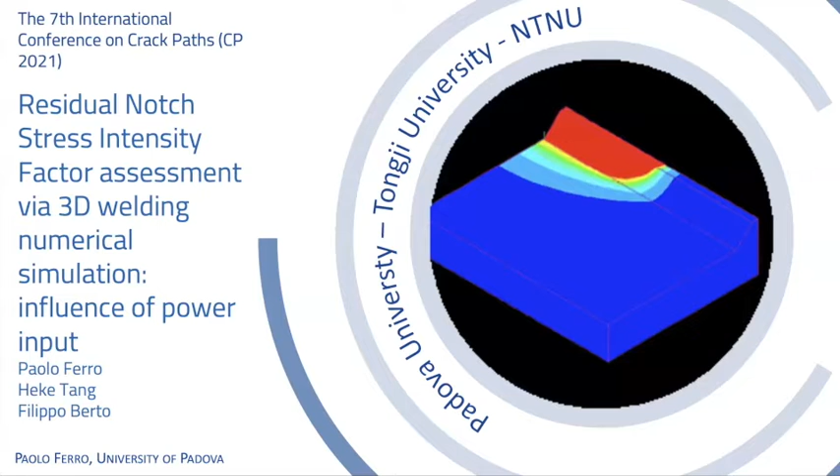Hi, this is Paolo Ferro speaking, and in my talk I would like to summarize the research work titled Residual Notch Stress Intensity Factor Assessment via 3D Welding Numerical Simulation: Influence of Power Input, by myself, Professor Tang and Professor Berto.

I will start with an introduction focusing on the goal of the work, and then I will proceed with the details of the numerical model, the results and discussion, and finally the conclusions.

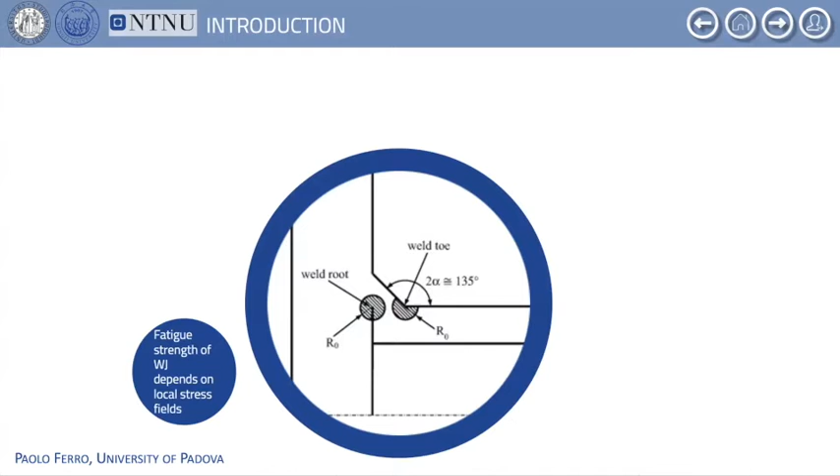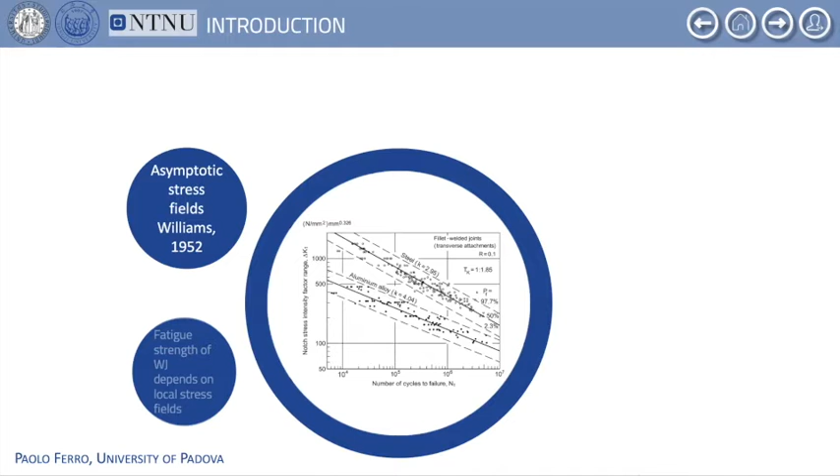It is well known that the fatigue strength of welded joints depends on the local stress field that arises at the weld toe or weld root. Because of such geometrical discontinuities, the local stress fields are singular in nature, and this is the same when we are dealing with residual stress as well.

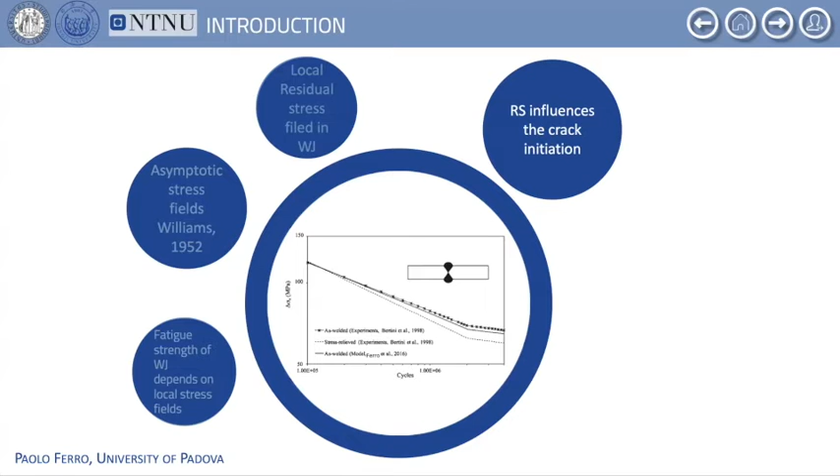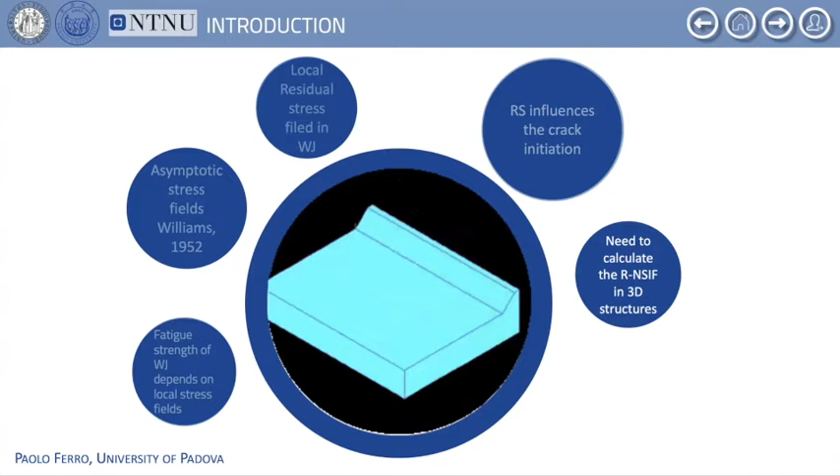The residual stress influences crack initiation in the high cycle fatigue regime, where plastic effects can be neglected. For this reason, it is very important to assess the parameter that quantifies the intensity of the singular residual stress field, called the residual notch stress intensity factor, in particular using 3D numerical models and therefore capturing boundary effects.

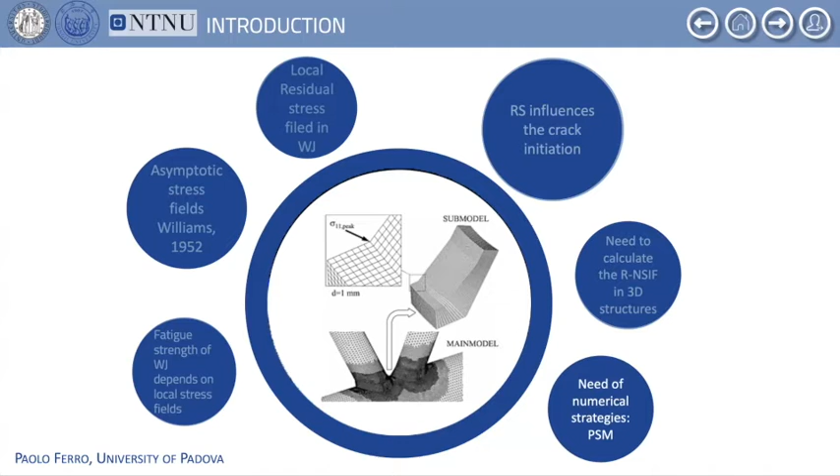Since 3D numerical models are tremendously demanding in terms of computational costs, numerical strategies are required to reduce the computational effort, such as the peak stress method.

In this scenario, the influence of process parameters on the residual asymptotic stress distribution has not yet been investigated using 3D numerical modeling of the welding process. Therefore, this work is aimed at filling this gap.

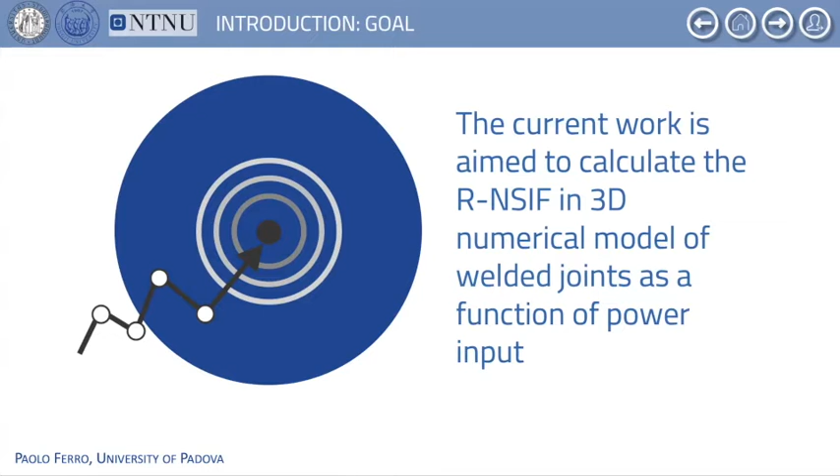Computational welding mechanics and the peak stress method are combined to calculate the residual notch stress intensity factor as a function of the power input. Results are then summarized in terms of heat input and discussed in view of a future guideline proposal addressed to designers who are going to face a welding process optimization for fatigue life improvement.

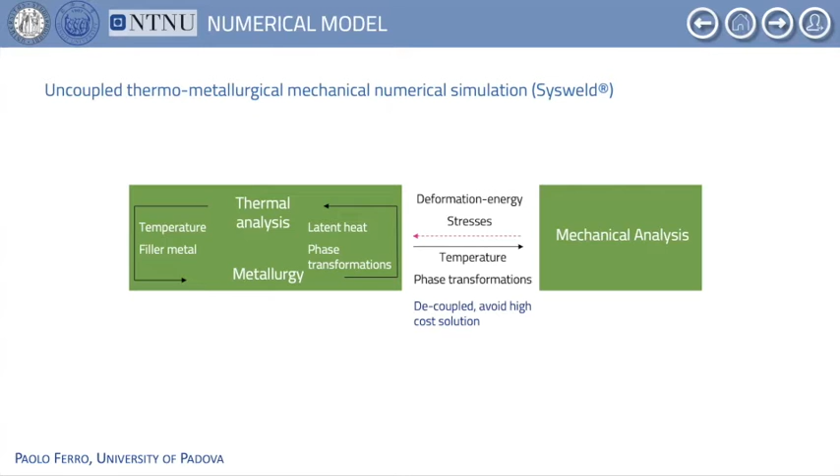A butt welding process was simulated using Sysweld code with the methodology known as computational welding mechanics. Thermo-metallurgical and mechanical analyses were uncoupled. Moreover, the welding is supposed to be performed with only one pass.

Taking advantage of the symmetry, only one half of the joint was modeled, as shown in this figure, where the global Cartesian and local cylindrical reference systems are displayed as well.

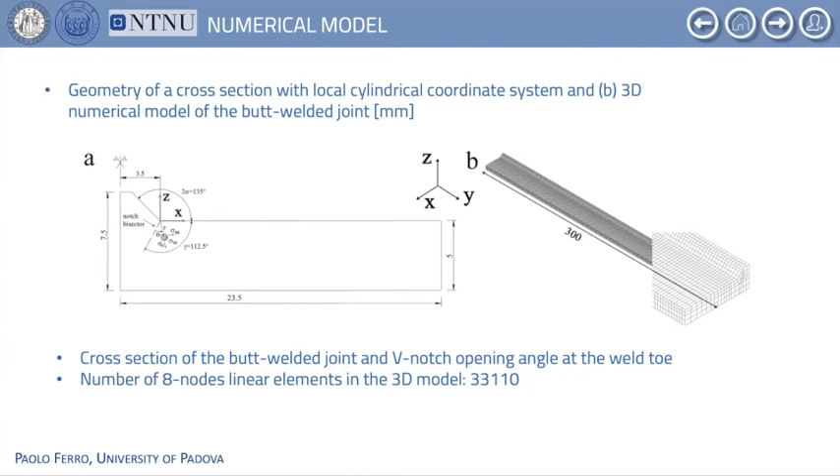33,110 eight-node brick elements were used to build the mesh, the smallest ones in the vicinity of the weld toe having a size of 1 millimeter. It is shown that the weld toe profile is assumed to be a sharp V-notch with an opening angle of 135 degrees and a null tip radius, which is the worst case condition.

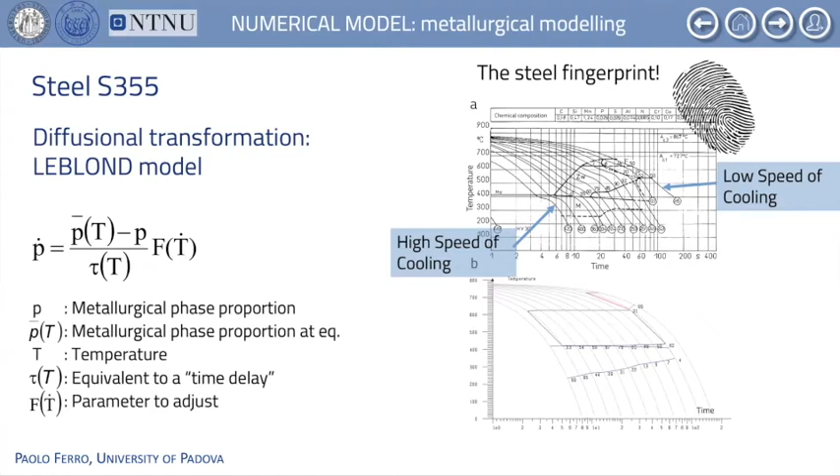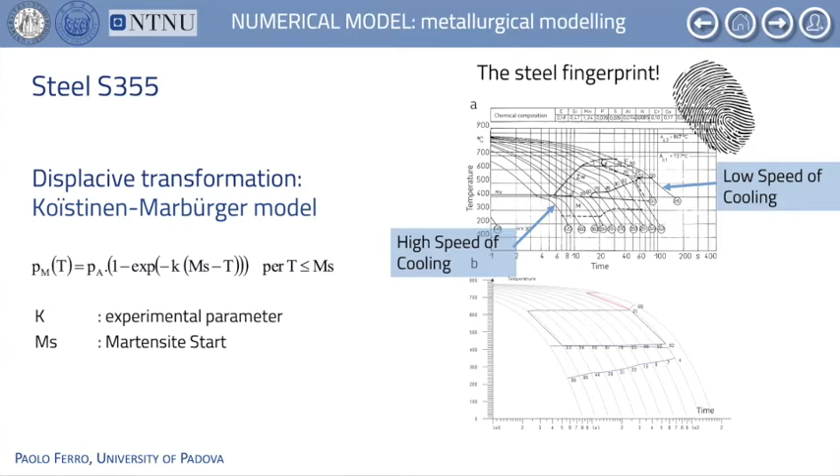The material investigated in this work is S355 structural steel, whose solid-state transformations are modeled using the Leblond-Devaux model when considering diffusional transformations, and the Koistinen-Marburger model when dealing with displacive transformation, as is the martensitic transformation. Model parameters are calibrated by referring to the experimental CCT curves of the steel, as shown on the right side of this slide.

The heat generation due to the heat source moving over the weld line is described by the power distribution function proposed by Goldak in 1984 for arc welding processes. Gaussian parameters of the Goldak heat source were chosen in a way that they produce a proper molten weld pool. Radiative and convective heat losses were modeled using the Stefan-Boltzmann law and convective heat transfer coefficients respectively.

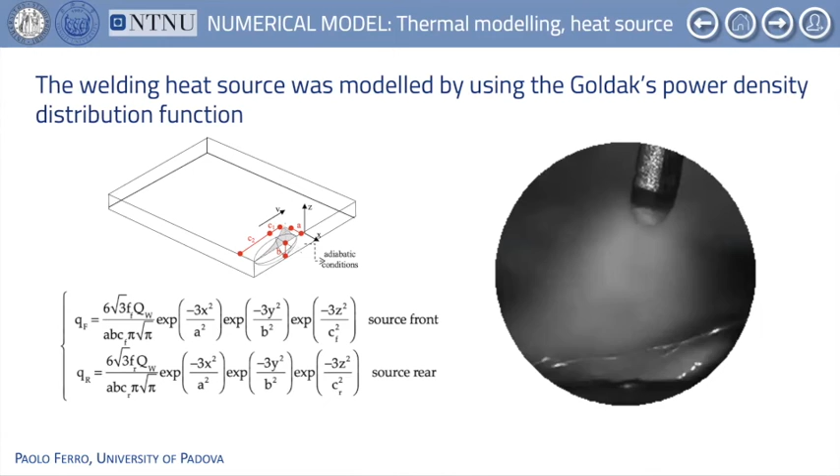Sequentially, a thermo-metallurgical-mechanical uncoupled simulation was carried out, where a dedicated function was employed to set the mechanical properties of the material to zero in all nodes where the computed temperature was higher than the melting point. Moreover, isostatic clamping conditions were applied during and after welding.

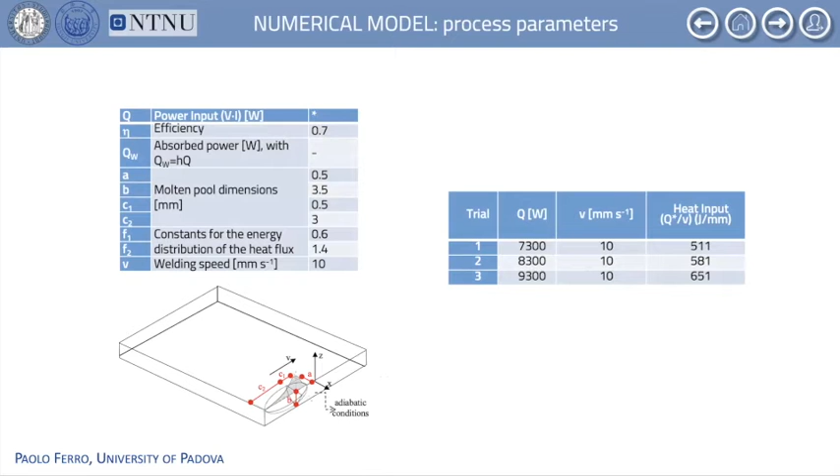These two tables show, on the left side, the parameters of the heat source kept constant, and on the right side, the power input values used in the trials.

In local approaches, the weld toe is schematized referring to the worst case as a sharp V-notch with zero-tip radius, inducing an asymptotic stress field whose intensity is quantified by the notch stress intensity factor K' or K1, given by the Gross and Mendelson definition in 1972 and described by equation 1 in this slide.

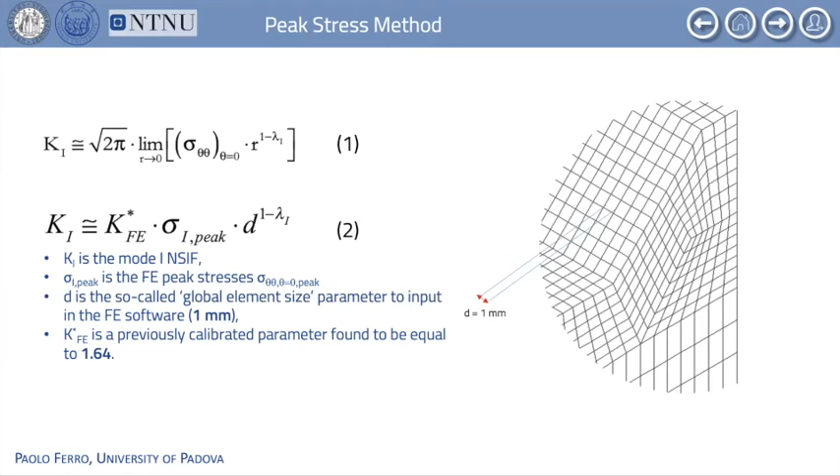When considering residual stresses, the notch stress intensity factor is called the residual notch stress intensity factor, and a rapid technique used to calculate it, even by means of 3D numerical models, is the peak stress method. It allows estimation of the notch stress intensity factor and the residual notch stress intensity factor starting from the opening peak stress calculated at the V-notch tip with a coarse mesh, according to equation 2 in this slide, where D is the average element size adopted to mesh the weld toe. In this work, D is equal to 1 millimeter.

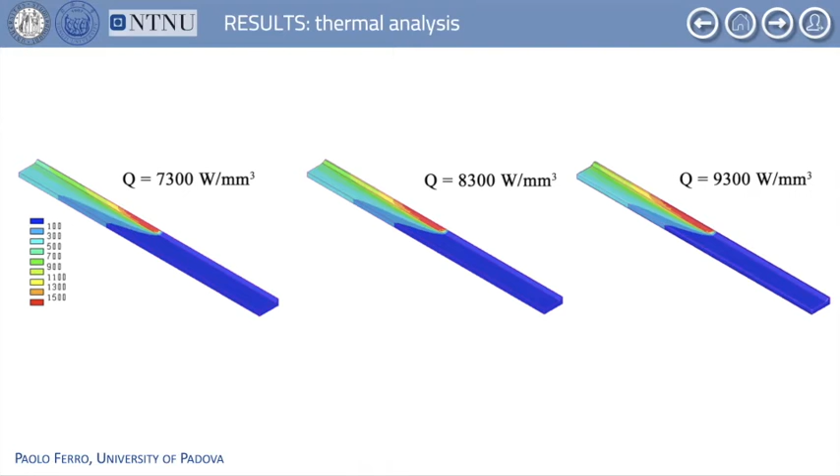This figure shows the fusion zone produced by the heat source during welding as a function of power input. It is important to observe that the bead geometry was adopted according to the analyzed process parameters. The higher the heat input, the larger the weld bead. As a matter of fact, the bead geometry varies with process parameters, so it was necessary to manually modify the geometry of the fusion zone, since fluid dynamic phenomena are not simulated in the computational welding mechanics approach.

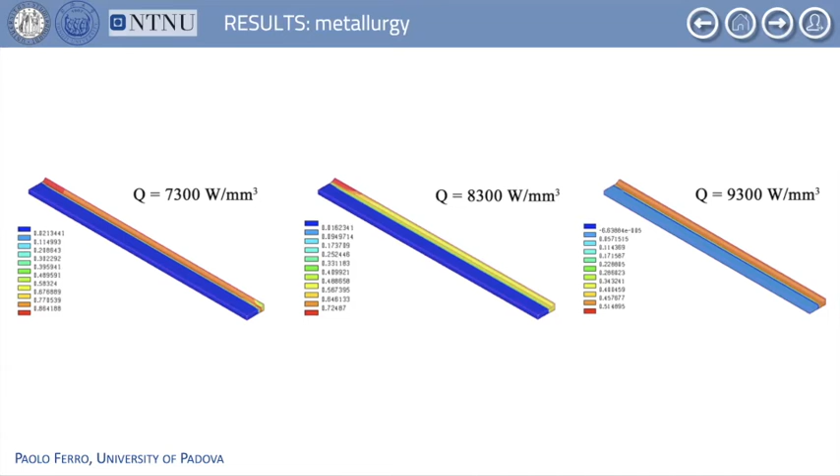Regarding the S355 steel microstructure, it is observed in the present figure that the weld bead is characterized by a mixture of bainite and ferrite, with an increase of ferrite as the power input increases. This is due to a decrease of the cooling rate with the increase of power input. Moreover, a stationary distribution of the microstructure is observed along the central part of the joint.

Such stationary value is the same that is captured by 2D models, as demonstrated in a recent work published by the same author of this work. The 3D modeling highlights, therefore, the boundary effects that seem more dangerous in terms of high values of residual notch stress intensity factor compared to the stationary residual notch stress intensity factor distribution.

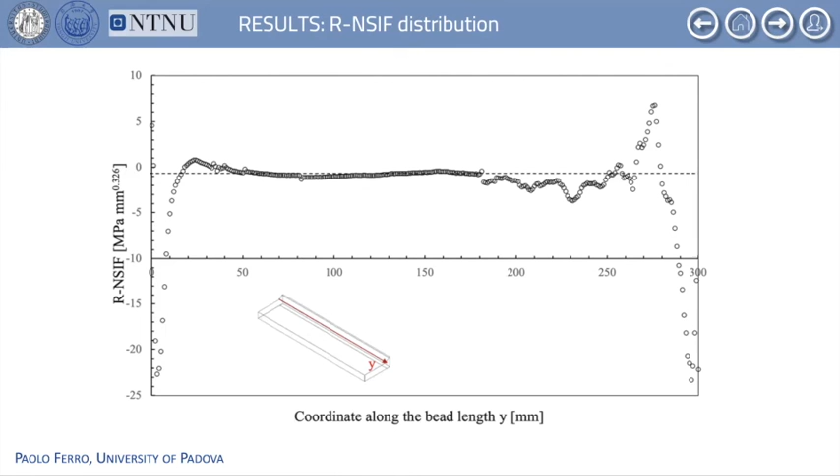Different boundary effects are observed at the heat source input zone compared to those that arose in the heat source output zone, reflecting the non-symmetric microstructure proportion at the boundaries induced by welding.

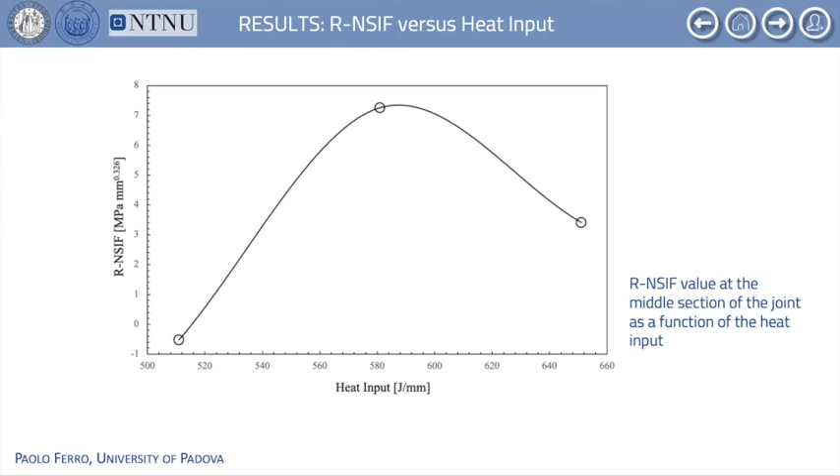This interaction, here only captured by numerical simulation, will surely be a matter of future and interesting research work.

So, we came to the conclusions. The residual notch stress intensity factor as a function of power input was assessed via numerical simulation. Solid state phase transformation as well as weld bead geometry variation were considered.

The obtained results showed a stationary value of the residual notch stress intensity factor in the middle zone of the bead, which reflects a stationary thermometallurgical history the joint undergoes. Boundary effects were captured as well, which seem more dangerous than the stationary field characterized zone.

Finally, a non-monotonic trend was captured between the heat input and the residual notch stress intensity factor value, which is the result of a strong interaction between the geometry and the thermometallurgical history, and that merits further investigation in the next research work.